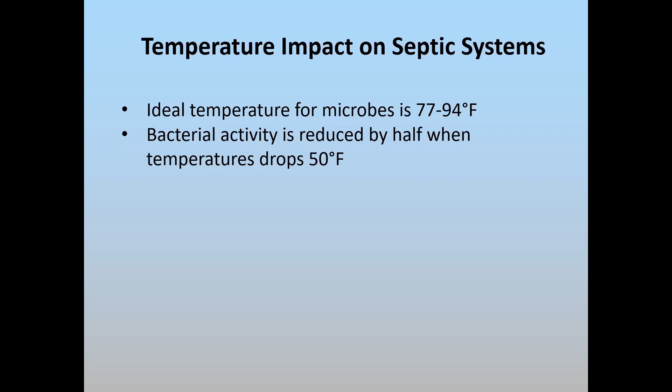And then if you were to reduce the temperature by, say, 50 degrees, then you're going to see about a 50% reduction in bacterial activity. And if you get really low in temperature, then they actually become dormant at about 35 degrees, roughly. So cold temperatures can reduce the breakdown of organics and nitrogen, and also reduce the ability of pathogen control in your system. However, fortunately, because these septic systems are buried, soil helps to insulate the tank and drain field in the winter months.

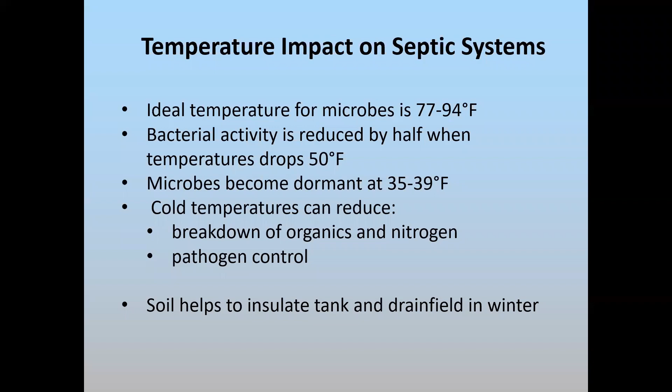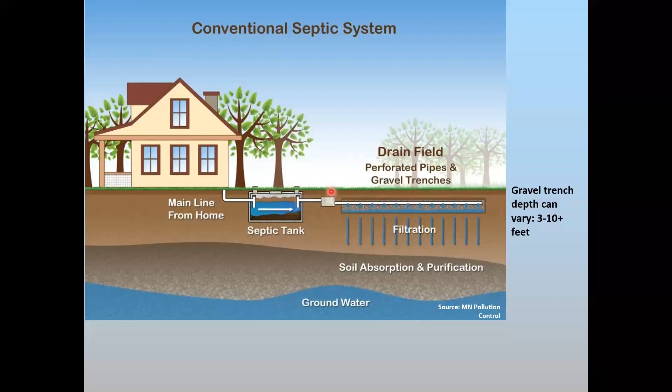So just looking at a typical conventional system, you can see here that the tank is underground, and it could be several feet below the ground surface, and the gravel trench tends to be several feet to many feet. So again, you're going to get some good soil insulation, but temperatures are still going to be reduced in the system throughout the winter months.

Other types of drain fields, you could have chambers, which are similar to gravel trench. The chambers just replace the gravel essentially. So they could be several feet buried down. A sand mound, of course, is elevated. Still, you have several feet of soil here to insulate that drain field area.

And drip dispersal tubing is kind of the exception, where it's buried very shallow. And that's good during the warmer months because those are very biologically active depths of soil. And so you're actually getting a little bit additional treatment because of that shallow depth. However, in winter, it could be an issue if the system is not getting adequate flow to help keep the temperatures regulated.

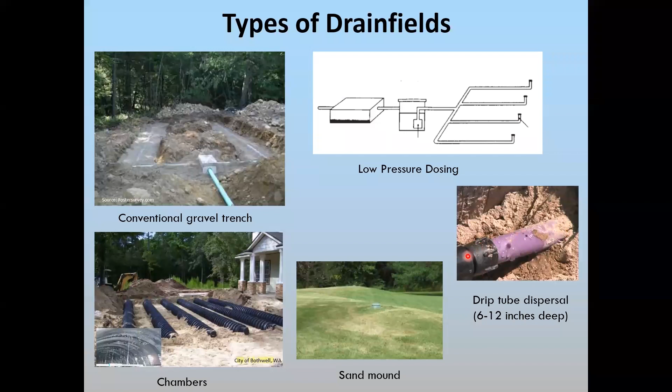And then if you have an aerobic treatment unit or a BAT, again, these tend to be buried several feet down, depending upon the type of system. And so you're going to get some insulation. But again, you can expect to see some decrease in efficiency, perhaps. It really depends also on how much water is coming into the system. And if you're using warm or hot water, that's going to maintain elevated temperatures within the treatment system.

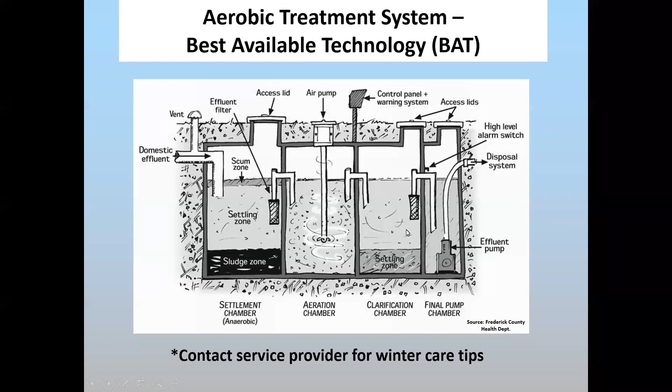So a couple of specific tips, again, depending upon where you live. If you live in more northern climates, it may be a good idea to leave the grass over the drain field taller. In other words, start leaving it taller, or don't cut it the last month or two before winter. That'll provide more insulation. And then if you're not planning on using your house during the winter, it's a good idea to have your tank pumped before closing down the house.

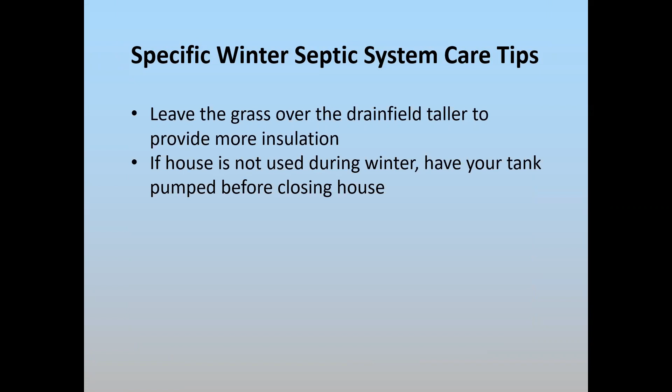Always a good idea to insulate your plumbing. This will help keep temperature elevated within the pipes, and that helps keep the septic system at a warmer temperature. Again, be sure that you're using some warm water or hot water during the winter months. You're probably going to do this with washing dishes and washing clothes, things like that.

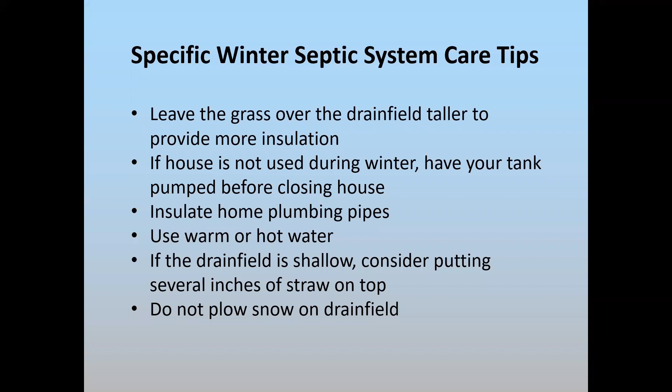And then if your drain field is shallow, say, for example, a drip dispersal system, then you can consider putting 6 or so inches of straw on top of the drain field. That will help insulate it. And another important thing is, do not plow snow on the drain field. Even though snow is a good insulator, you don't want to overload the drain field with snow. First off, you don't want to drive on the drain field, but secondly, you don't want to overload it with snow, because you still want oxygen to flow into the drain field to feed the bacteria so they can do their job of breaking down organics.

So some year-round tips that are very important. If you have any leaks, be sure that you fix those. You want to conserve water. You don't want to add additional water to your drain field. Do not use a garbage disposal, because it chops up organics and can potentially add more organics to the drain field. Fats, oils, and greases, again, can clog soil pores, and you don't want that.

Any chemicals, it's okay to use a normal amount of chemicals, but you don't want to pour excessive amounts or empty a bottle of bleach, say, down your drain, because that's going to impact the bacteria in your system. Only flush toilet paper, no wipes, because they can clog systems. And then this is real important: be sure that your stormwater is running away from your tank and drain field. You don't want to add additional water to your system.

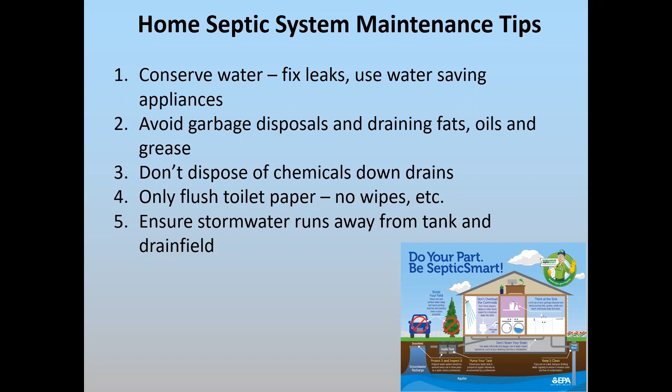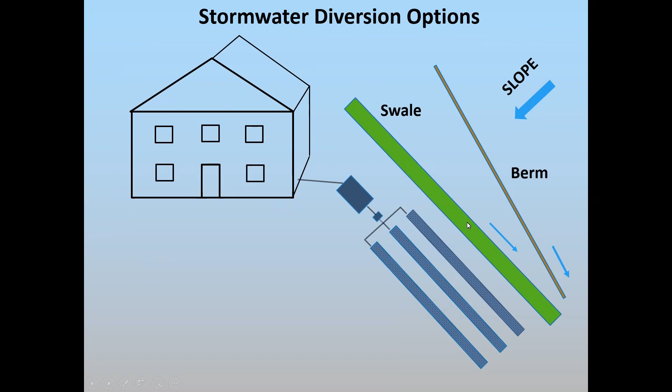So here's a couple of options here. If you have, for example, a slope in this direction towards your drain field, you have a couple of options. You can put a berm to channel the water away from the drain field. You can put a swale, which is a very shallow ditch, if you will, that can help route water away, or you can use kind of a French drain system, again, to collect that water that runs off and then channel it away from your system.

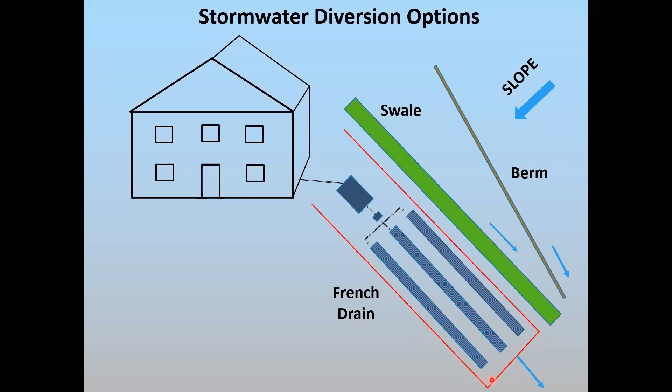Again, I mentioned driving on your drain field compacts the soil, and that reduces the infiltration rate of your wastewater, and that'll shorten the lifespan of your system. Trees near the tank or the drain field usually don't mix. There are some species of trees, and that's another topic, and I have a video on landscaping septic systems on our website. You're going to want to pump your tank about every 3 to 5 years. And if you have an advanced treatment unit or a BAT, maintain that service contract. And that service provider can also provide you any additional guidance on necessary winter care tips.

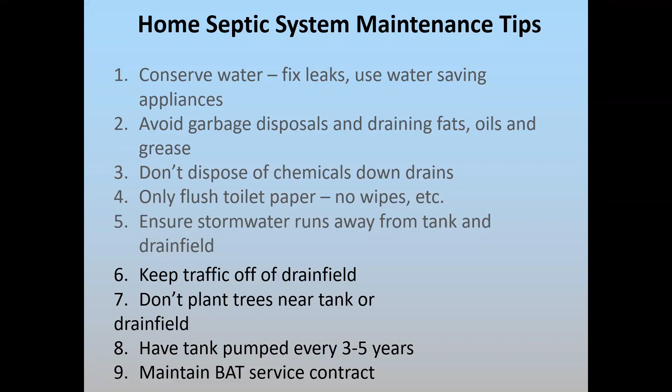So there's a wealth of information on our website, as well as your local county health department has information on septic systems. In the state of Maryland, of course, it's our MDE on-site division. And EPA has a lot of information for homeowners about their septic systems.